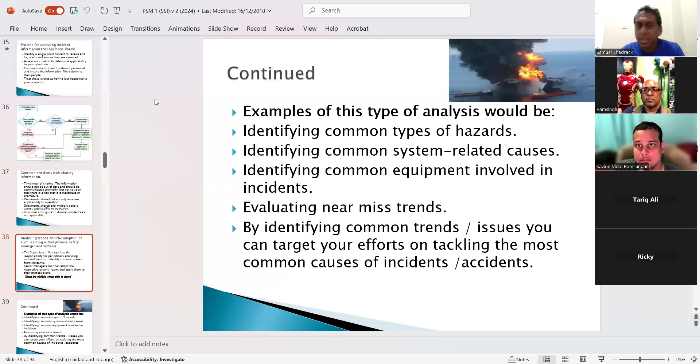So where we are is 1.4. There are different teaching techniques I could use to make us go faster or slower, but really we do take two sessions to finish off one of these PowerPoints. So I was contemplating moving a bit faster and starting lesson two, but then I said perhaps we can probably do a past paper or something. So I'll see how it goes, till about 2 o'clock we'll see what happens.

I actually have a video lined up, but the internet, just starting the class, was giving some issues. The funny thing is, I came from the office about 10:30, went there because I'd forgotten some stuff yesterday. The internet isn't always 100% effective here in Trinidad, or on the island anyway, but the one in the office is actually a bit faster. When I logged on it was about quarter to one and it wasn't connecting. The video pulls more internet, so we'll see what happens around 2 o'clock. I think by then we should be finished with the theory, so we'll look at the video and do some past papers around that time. As I have you and the internet is good for now, I think I'd prefer to do some teaching.

So the first one here, the purpose of benchmarking. Let me read a couple of slides. We don't have to read all of it, because remember I wrote these PowerPoints, so I know the idea behind them. Once you get the idea, once you understand the concept, we could just explain the rest of the slides.

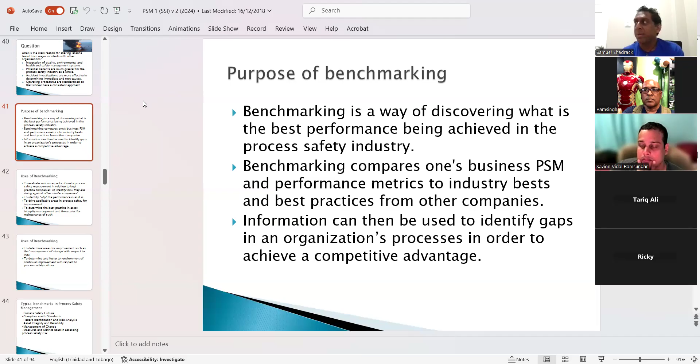And best practices from other companies. But benchmarking could be with anything, I think we falsely do it sometimes, I'll talk about that in a bit. Information can then be used to identify gaps in an organization's processes in order to achieve a competitive advantage. Let me read a couple more: the use of benchmarking to evaluate various aspects of one's process safety management in relation to the best practice in other companies.

To identify how they are doing against other similar companies, to identify why the performance is as it is, to drive applicable areas in process safety for improvement, to determine the best practice in asset integrity management and time scale for maintenance. That latter one is just an example of something that could be measured in process safety, like asset integrity. Asset integrity is like how often a chemical plant is doing routine maintenance.

For those of us in Trinidad, like Atlantic LNG, Proman—how often are they doing shutdowns? Two for the year, three for the year.

And then if we have a plant, not as big as Atlantic or Proman or one of the bigger gas plants in Trinidad, but maybe a similar smaller plant—are you all doing maintenance at all? You can measure up against the bigger companies, which would have the resources. So maybe you base it on the manufacturer's instruction, your risk assessment, and your resources. That's the purpose of benchmarking.

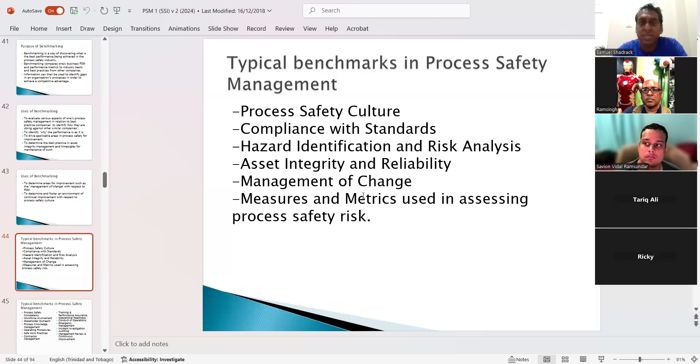And look how much I put here again now. These are not really exam questions. They're just to let you know. I mean, not everything, folks. Remember, it's only 40 multiple choice questions, right? So not every word could be a question. Sometimes you have to just understand the class now, right, and what we're trying to learn. And an exam proves that you learned something, but hopefully you learn more than just what is on the exam.

So I put a bunch of them here, a bunch of process safety indicators, process safety competence, right? Well, I wouldn't explain every one, but I mean, you don't have to learn any.

technician, you're in the field of process supervisor, and it's kind of making its rounds, right? NEBOSH is kind of taking the market with process safety, right? Because, I mean, how do we know that? How do we know that? On a small island in the Caribbean, which is miles away from England, they're asking for process safety here.

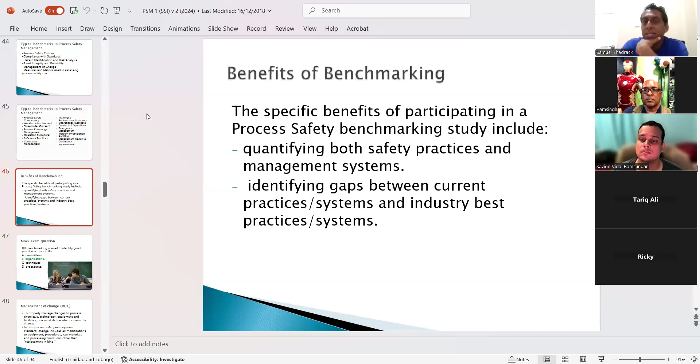At the end of the day, the questions are simple, right? Despite the work being deep, remember that's the thing with level 4 - it picks up from where level 3 left off. But the exam is multiple choice. So even though the work is more, like you never really learned about MOCs and things like that in level 3. But at the end of the day, you don't have to write an essay on MOCs or outline 10 reasons to do an MOC. It's not like that - it's an easier exam, a multiple choice exam. I said to you all many times, I love courses like these. It's no stress for me, no stress for you. Little bit of stress, but little bit of stress is good sometimes - it helps you get your certificate.

So let's go to the next concept - management of change. I'll read a couple again. If we find it getting a bit boring, I'll just explain it all to you. In fact, I already explained this to you.

Management of change: to properly manage change to process, chemicals, technology, equipment, and facilities, one must define what is meant by change. In this process safety management standard, change includes all modifications to equipment, procedures, raw materials, and processing conditions other than replacement in kind. So if something has come to the end of its life, like a car battery, a catalyst, or a piece of equipment that you purchase and the belts need to change after 6 months, that doesn't require an MOC form.

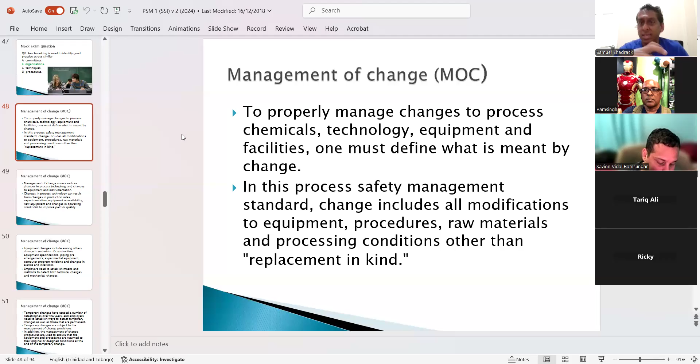Remember, if these things are not done, as I was saying, these things can lead to a catastrophe. So these forms are very important.

Management of change covers such as changes in process technology and changes to equipment and instrumentation. So I just listed a set - from the next three slides, you'll just see a set of things that could be changed.

Change in process technology can result from changes in production rates, experimentation. Experimentation - I'll give you my example. It's like if you were checking flow rates from a pump in the oil and gas industry.

Pumps operate with something called RPM, revolutions per minute. So you can check how much a pump moves per minute. That affects your flow rate - what's the flow rate of the pump to fill a tank. This is kind of process safety, so you could use some of these examples.

If, just say, through experimentation the technicians set the RPMs of the pump at about 50 revolutions per minute, that's not too bad, that pump isn't running too fast. But based on the flow in the well - using my oil background here - let's say it's a well that has good oil in it, good pressure oil. They could probably get that tank filled with 40 revolutions per minute. So 40, and that came about from experimentation.

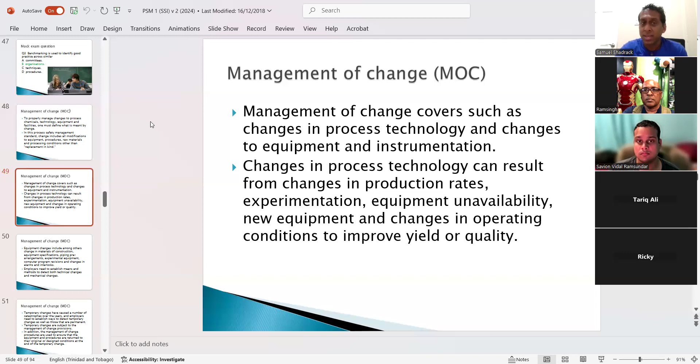So I'll let you read the rest. Equipment unavailability, new equipment, and changes in operating conditions to improve yield or quality. I think I gave enough examples on that. Equipment changes include, amongst other things, changes in material of construction, equipment specification, piping arrangements - all of these are just examples of change. Experimental equipment, computer program revisions, and changes in alarms and interlock.

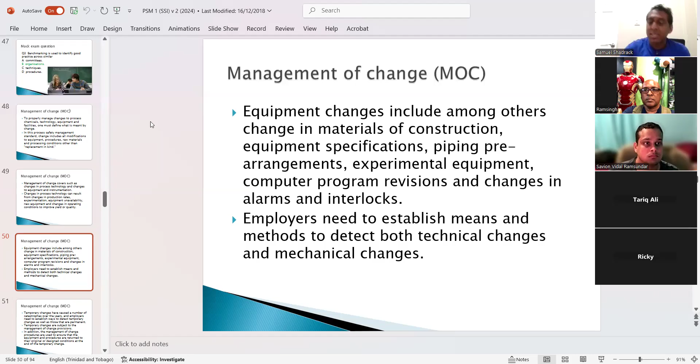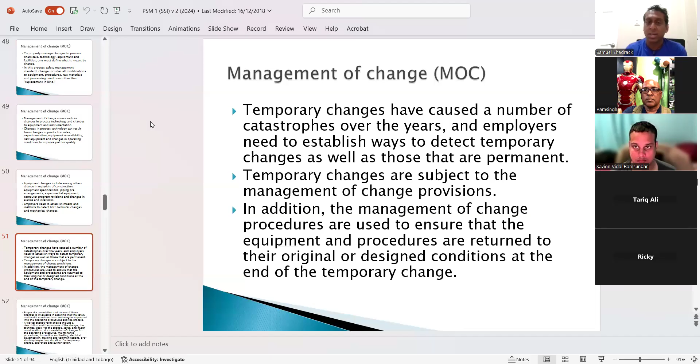Employers need to establish means and methods to detect both technical changes and mechanical changes, and the means is the MOC form. Temporary changes have caused a number of catastrophes over the years, and employers need to establish ways to detect temporary changes as well as those that are permanent. Temporary changes are subject to the management of change provision. In addition, the management of change form procedure are used to ensure that the equipment and procedures are returned to the original or design condition at the end of the temporary change.

Proper documentation and review of these changes is invaluable in ensuring that the safety and health considerations are being incorporated into the operating procedure and the process. But as I said, remember, the MOC form will consider what's the health and safety implication of this change.

A typical change form should include a description and purpose of the change - so why are we making the change - the technical basis of the change. All of those will be like headings on the form: safety and health consideration, of course, documentation of change for the operating procedure, maintenance procedures if you bought a new piece of belt, conveyor belt, whatever, inspection and testing, electrical classification, training and communication, pre-startup inspection. All of these things will now become part of what you look for.

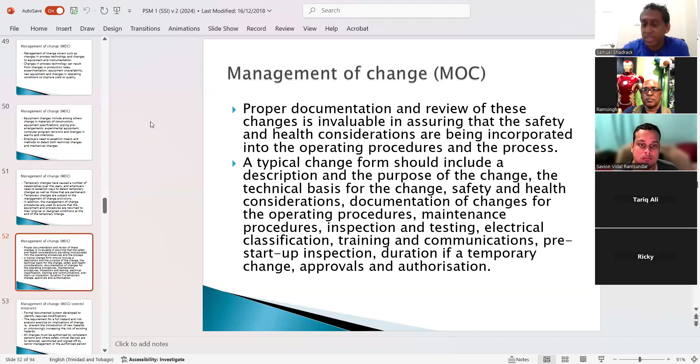Remember, if you change the RPMs of a pump, then when you're going to start up, that's what you're looking out for, the new RPM. Duration, if a temporary change, approval and authorization of this new change or new piece of equipment that you would have purchased.

Management of change control measures - a formal documented system developed to identify required modification, the requirement for a full hazard and risk analysis exercise on implication of the change, i.e., prevent the introduction of new hazards or unknowingly increase the risk of existing hazards. So again, when you consider the hazard of your change, that should come out of it. A risk assessment should be part of that.

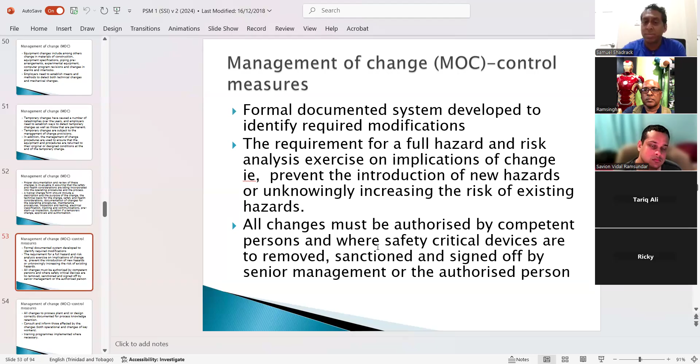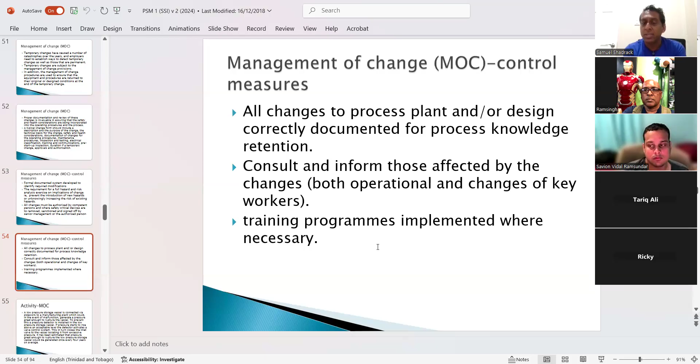All changes must be authorized by competent persons, and where safety critical devices are removed, sanctioned and signed off by senior management or the authorized person. All changes to process plant and or design correctly documented for process knowledge retention. Consult and inform those affected by the change, both operational and changes of key workers. Training programs implemented where necessary.

Right, we can have a read of this. I think I gave you enough examples. This is an example of somebody changing something. So I give you my pump example, I think that's good as any other change. It was just meant to be an activity where they change a particular aspect then. So the one I used, the pump changing the RPMs, would be sufficient.

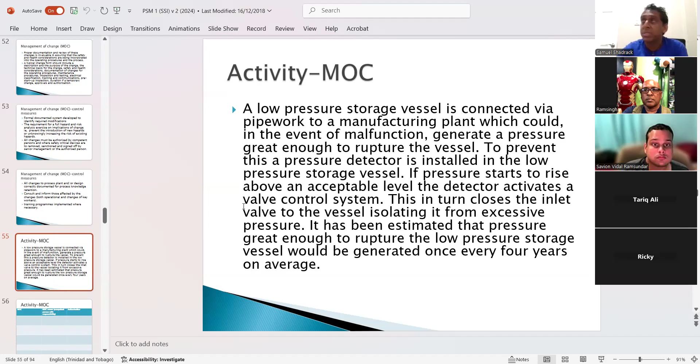There's a question coming up they'll ask you, like a company is considering changing out a component - what's the best way to safeguard the workers in terms of hazards and risk? The answer will be do an MOC form, because the MOC form will consider the hazards and risk - what should be the hazards and risk of the proposed change, or the implication of the change. I think that's it for MOC.

I think we have worker engagement. This is simple as well. Let's do this one. Some simple concepts anyway, but again, all of them have questions on them. So, worker engagement - could you just give me a minute?

I want to take off the AC. I told you I had the AC on, or maybe I'll probably put it a bit higher. Just give me a minute, 'cause the AC remote is on the other end of the room.

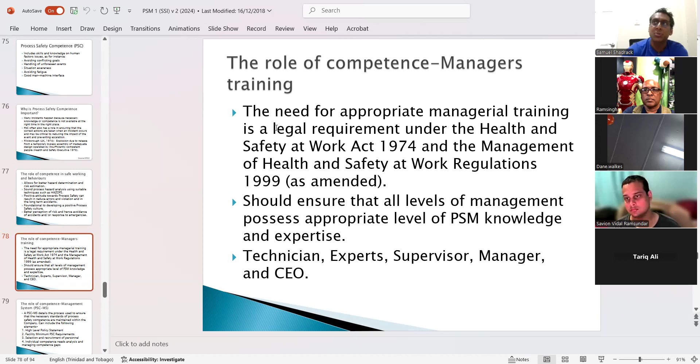So where this was going, right, is that in process safety, what they will normally do is create what is called a training needs analysis. You all may have heard about it before. So what they do is, in this course they call it a PSCMS, Process Safety Competence Management System. If you don't know what a training needs analysis is, it looks at what knowledge and skills you have and what knowledge and skills you should have.

And then what they will do is schedule your training. I'm just using this course as an example. If somebody is in safety and we say, okay, we should really do process safety, so you have the NEBOSH level 3, but we see vacancies asking for level 4. So then we say, for the next six months we're going to try to track a supplier and see who offers the NEBOSH process safety course in Trinidad or in Guyana and try to get the course done. That's where this was heading.

Filling that skills gap then, that could exist. That does exist, yes it does exist, let me tell you why I say that. You see, a training needs analysis is done every year for your workers. Please remember that. Nobody should say then that they know it all, or that they don't want to learn anything more.

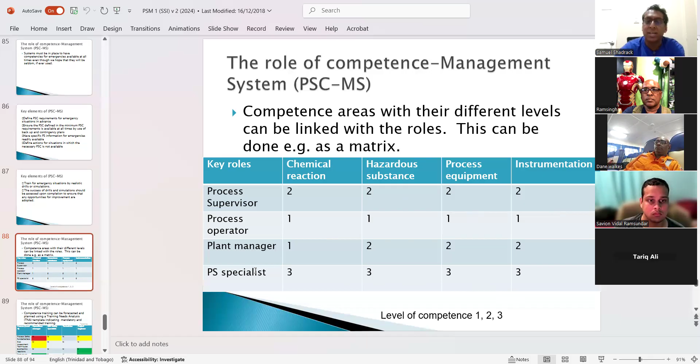So that's one example of a TNA, training needs analysis. Again, it's not as if you have to make up a TNA like what I am doing here, because how it's normally done, I mean, I do one, remember I have a school. So I do one for my workers. And I have the lecturer that's doing the shorter courses do, like probably defensive driving, maybe confined space for himself.

The girl at the office, I will have her probably do a safety course so she understands what we're doing. But to work at Shadrack City, you must have your NEBOSH certificate. Even for my general manager Kevin, and one of my directors Brent, I had them do IOSH Managing Safely, because they need to understand it's a school, but it's a safety school. So if somebody calls and asks a question, like what is this, what is a hazard, or whatever have you. In fact, this week here, somebody called and asked a question on the project for level 3, and I did not interrupt the call.

I waited to hear what the girl in the office would say, because that's what we asked - they have NEBOSH to work by us too now, right? So not just any companies, we are a safety school. We offer NEBOSH, so we ask that anybody working by us have NEBOSH as well. And the person asked a simple question.

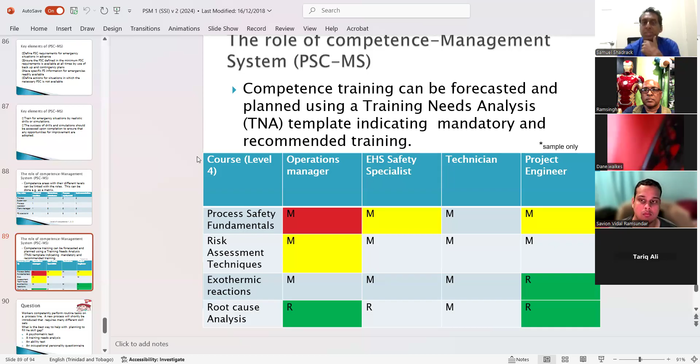So anyway, the question coming out of this, so this is the slide, this is what it came to. The slides that I didn't read, this is where it was heading. If you look there, PSC-MS, PSC-MS, PSC-MS, all of that was heading to this slide. This is the main thing today then, right? The main part, the end of the course.

What I've seen them saying is training needs analysis, TNA. So you have to memorize that. If that's not a familiar phrase to you, TNA, you can memorize that, right? TNA wrestling - of course, not the same thing. I've not seen them saying PSCMS though, I've not seen them saying process safety competence management system, even though that's the phrase used in the book, right, and in the syllabus. I've just seen them use saying TNA.

Take a look at this one. Based on the time, I'll read it for you, right? So workers competently perform routine tasks on a process line. A new process will shortly be introduced that requires many different skill sets. What is the best way to help when planning to fill the skills gap?

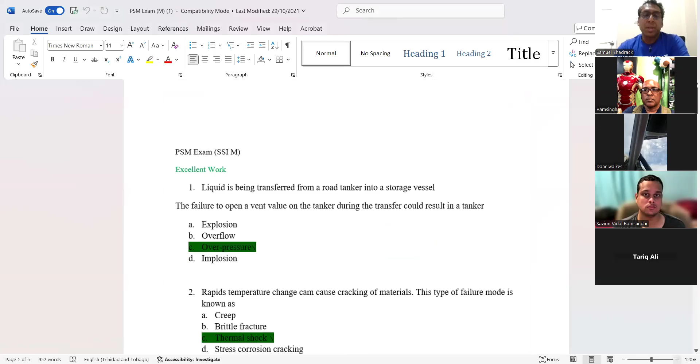We thought about starting chapter 2, but we can look at some questions, right?

A long and short story here is that they don't have too much of past papers anymore. Remember, since the pandemic, the course went online, so we don't have much past papers. So this is actually not my past paper, and there are many reasons for that, I'll just make it short. This is a student's paper that I was able to get back.

If you wonder what happened to mine, I think I told the classes. It's not an excuse, but it is the truth. The machine I had was stolen in a robbery, as well as the secondary, and all my stuff was lost. Passport, everything, money, everything.

So all 10, 15 years of stuff was stolen. My general manager said it's not a joke. The general manager said to me, it had to take a robbery for you to change your computer, because I had the same computer for years. That's one of the reasons I never changed it. I would update it and stuff, but I never changed it because I know the wealth of information in it. So folks...

Are you all listening?

These highlighted answers here may not be mine. So when you go through them, if you disagree with them, just let me know now. This is something I had to go on my email and check and see who did assignments for me and try to track it back. This robbery was last year, October, November, not too long ago. There was no way to retrieve 15 years of stuff stored in a machine. I tried. There are ways we tried, like emails and stuff.

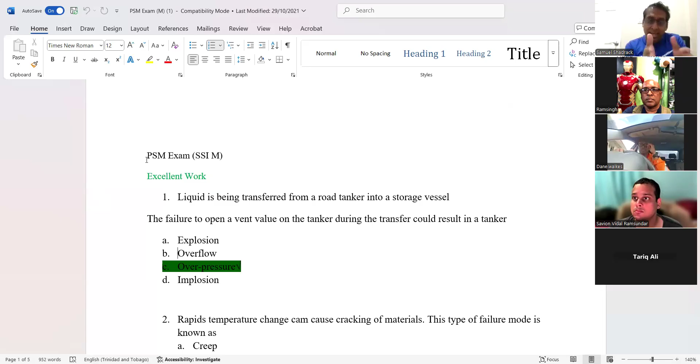So when you look at this, don't say I did this. If you disagree with it, just tell me why, and I'll let you know if I agree or disagree with it anyway.

This was a lady, I can't remember her name. I don't know if her name is on it. She used to work, she probably still there, but she used to work at National Petroleum. Anyway, let's start. So the disclaimer here is not all these things are mine, and I told you why and what has happened.

Liquid is being transferred from a road tanker into a storage vessel. The failure to open a vent valve on a gas truck, the NP or the Exxon or the Shell trucks. A failure to open a vent valve during the transfer could result in tanker explosion, overflow, overpressure, implosion. Now, it's a vent valve, so that should tell you something about air.

So I do agree with this one. Do you all agree with this one, that the answer here is overpressure?

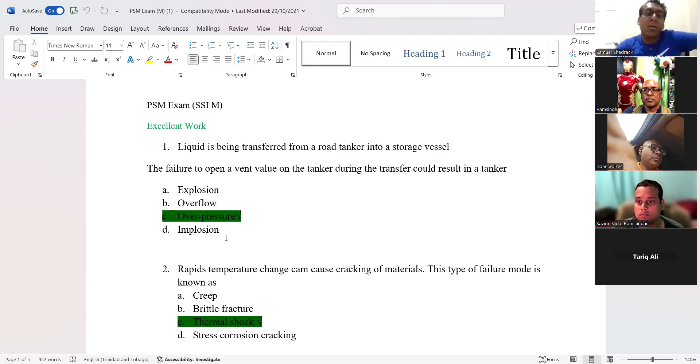Yeah, we haven't done all of this, right? I just say we needed to. Anyway, there's some psychological reasons why. If you want, we could actually look for our questions and things we did today. But what I'm trying to say too now, process safety is not that hard. If you really think about it, we haven't done this yet, that's chapter 3, but you could still guess it because you know why. Could the answer be right there?

Let's look at number 2. Folks, I'm not looking at the chat yet. I'm trying to see if I could cover 10 questions and I have about 12 minutes to cover 10 questions. When I finish the 10 questions, I'll check up on the chat and see the answers you put in. If you want, could you just probably tell me verbally, because looking at the chat will take some time. Let me try to get 10 questions behind us.

Rapid temperature changes can cause cracking of materials. This type of failure mode is known as creep, brittle fracture, thermal shock, or stress corrosion cracking. Well, if it's temperature changes, I would still go with thermal shock. I do agree, the answer is number 2, C.

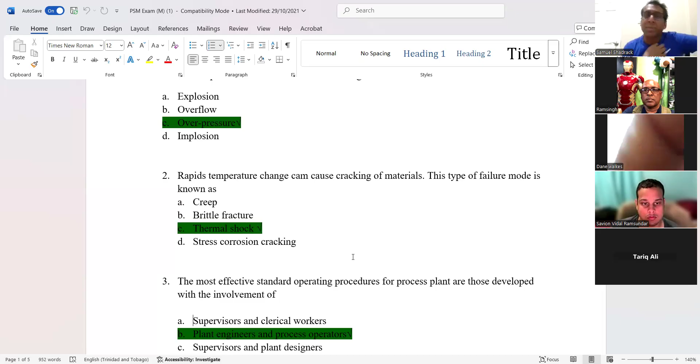If you have your paper, I think we sent you this. Now, I don't know if I sent you this one. I told you it's impossible to get past papers now because it's a digital exam. So what we have is some of the years before the pandemic, and I even lost all mine, but I told you I was able to track down those students that did it and hand back to us then.

The most effective standard operating procedures for process plant are those developed with the involvement of... This is like today's question because it's about employee involvement, right? So, the most effective SOPs for process plant are those developed with the involvement of supervisors and clerical workers, maybe not, because we're talking about SOPs. Plant engineers and process operators, I agree with that. Or supervisors and plant designers, plant engineers, and clerical workers.

Because it's a process safety course, I will go with B. I agree the answer is B. If it didn't have process operators, I may have gone with supervisors and plant designers. But a plant designer wouldn't really be there in your standard operating procedure. SOPs are like how you're emptying out a tank and how you're going to fill it back up, what the steps are now. The people who designed that plant aren't really there anymore, so I don't think C is the correct answer. Sorry, not D, sorry, my mistake, my apologies. Number four, right? I'm not too sure why I said D, it was number four I was going to say.

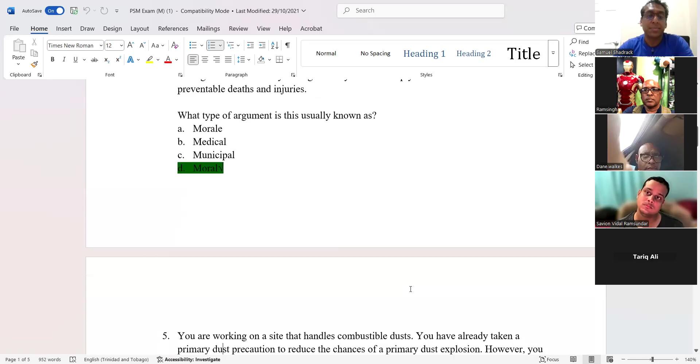Let's see if we can get this one done quickly. You are working on a site that handles combustible dust. You have already taken a primary dust precaution to reduce the chance of a primary dust explosion - this is actually chapter 4. However, you are worried about the risk of a secondary dust explosion. What is the best way to reduce this risk? Avoid ignition sources, have explosion relief vented - well, it's a vent, right? Explosion suppression, or good housekeeping. Believe it or not, the answer is actually D.

A secondary dust explosion is, well, number one, secondary, meaning it had a first explosion. What are dust explosions known for? There's normally a primary explosion that stirs up the dust, and a secondary explosion that happens once the dust has become airborne. But if there wasn't dust in the first place, there wouldn't be a secondary dust explosion, right? So that's why housekeeping is the best answer for number 5. Look out for it in chapter 4, like I said, we'll get that. Hopefully by that time everybody has gotten the book so we could follow through with the textbook.

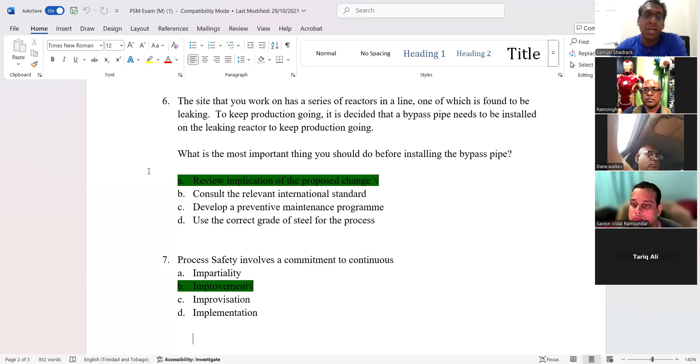Number 6: the site that you work on has a series of reactors in line, one of which is found to be leaking. To keep production going, it is decided that a bypass pipe - this is Flixborough - needs to be installed on the leaking reactor. What is the most important thing you should do before installing the bypass pipe? Review the implications of the proposed change. I'll just go with that because that's the correct answer and we're kind of running out of time. The rest of them actually don't make sense - if you're going to put on a pipeline, you don't need to check the international standard.

So process safety involves a commitment towards continuous... the answer is B, improvement. They have impartiality, that's wrong, improvisation, implementation. Number 7 is B. Number 8, well, look, one from last week.

Sorry, the answer's there, otherwise I would have asked you. Anyway, I think the answer - let's see if the answer's correct. All the answers seem to be correct so far, right? But this girl was a bright girl, that's why I tracked her paper down. I can't remember her name at all, though. Not at all, I tried to, but I can't.